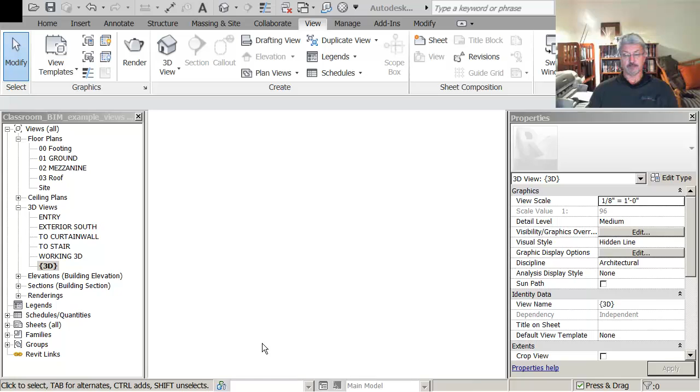So I've shown you how you can put building components in, but what I want to show you is how to just add a couple of views.

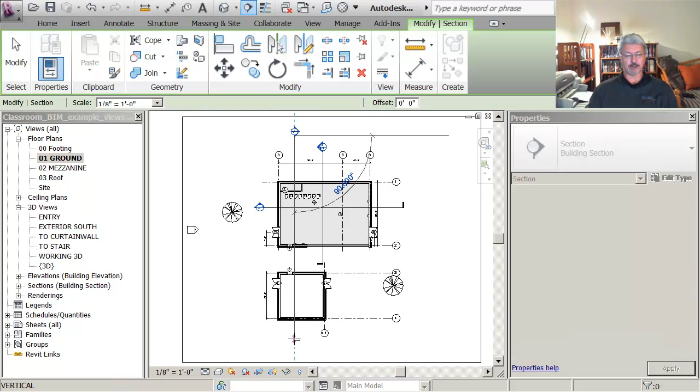So I'm going to go to the ground view, and on the view tab, I'll go first to the section view. I'm going to place a section that runs all the way down and through my model, just beginning and end. Notice that I can flip the direction to decide which way I'm looking, and I want to look from left to right. I can also decide the extent of my section, so I want to make sure this goes beyond the end wall.

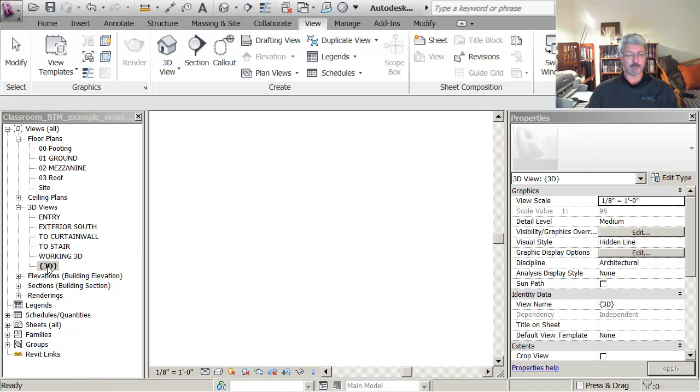Now the way I maneuver around in here is I can click on the head to take me straight to that section view. I could also find it under the sections tab, and typically I'll rename it. So I'm going to call this working section.

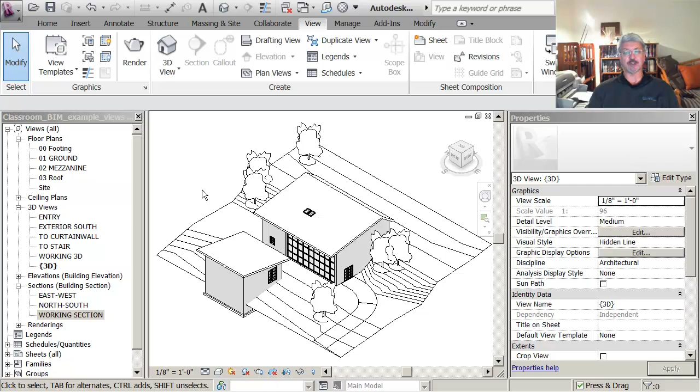I'm still thinking about designing conceptually, and it's helpful for me to have views labeled as working views, because later I can delete them and just keep the ones I need for documentation. So the other kind of view I wanted to show you is the one I've already called working 3D view, and the view itself has properties.

So if you look over here on the properties palette, I can come down and turn on the option that says section box.

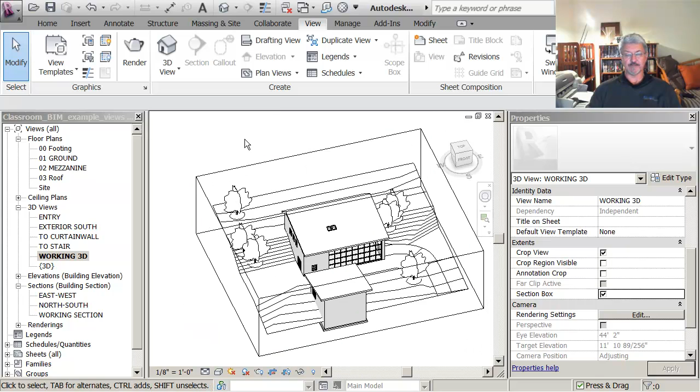In that particular view I can do things like VG, which is visibility graphics, and turn off the topography just in this view so that I don't see it. I'm also going to turn off the planting. So this is how I control what's in my views.

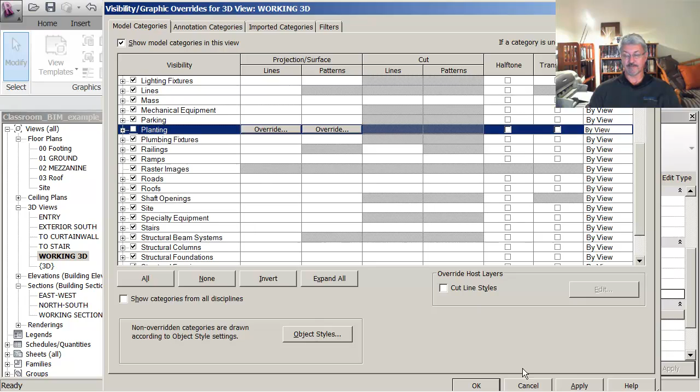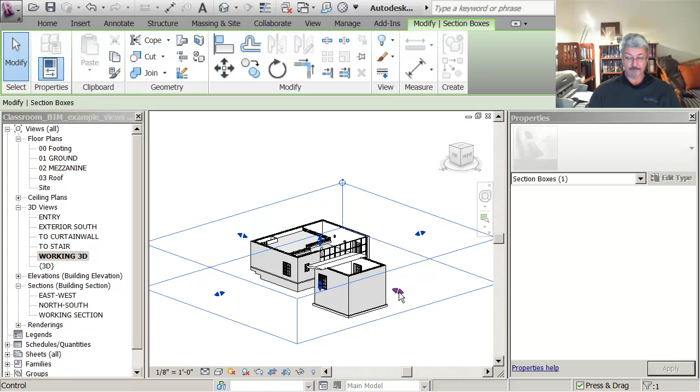And the purpose of this section box, you see, if I turn this and look at it, I haven't put foundations in here yet. What I'm going to do is select the section box, and you see that I can actually drag on a control to move it up or down through the model. So I can be moving that to adjust what I'm seeing in my model.

Let's move this just a little bit up so I'm seeing the mezzanine level. And then I can use my options here to decide whether I want to see it shaded, and I work with it like that.

The purpose of the section box is to limit how much of the model is in the view, which can improve the speed and performance as I work in a very large building.

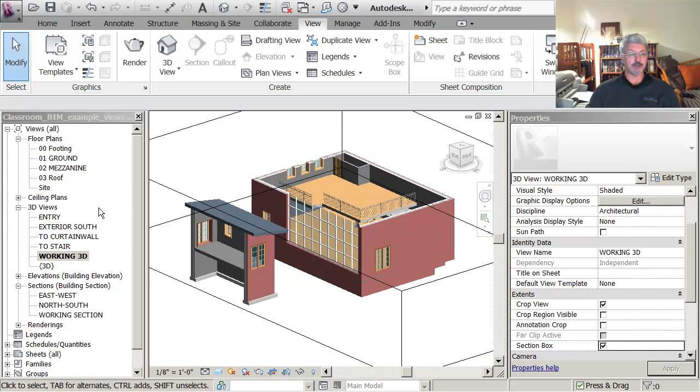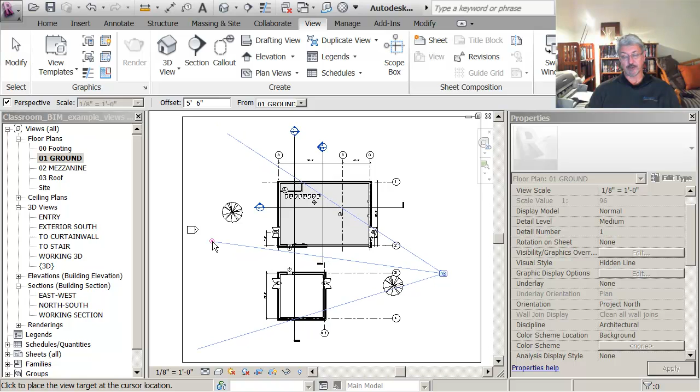The last view I want to show you is if I go back to my ground level here. What I want to do is create a view where I'm standing here and looking this way towards my building. I can go to the 3D view and a camera. I want to stand somewhere to this side of the tree, and be looking at the opening between the two buildings. So I go well beyond the opening, beyond the objects I want to see in my view, and now I can see the choice here of what it looks like.

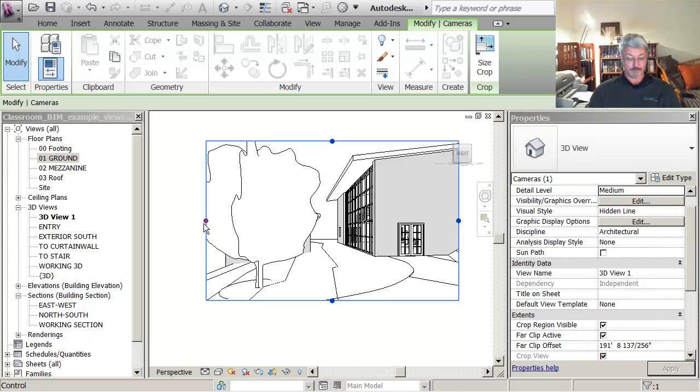So I'm seeing my space between the buildings there. I can click on this and make it a little bit bigger so I can see a bit more of my building. I'm going to adjust that slightly. I'll say ZF, zoom fit.

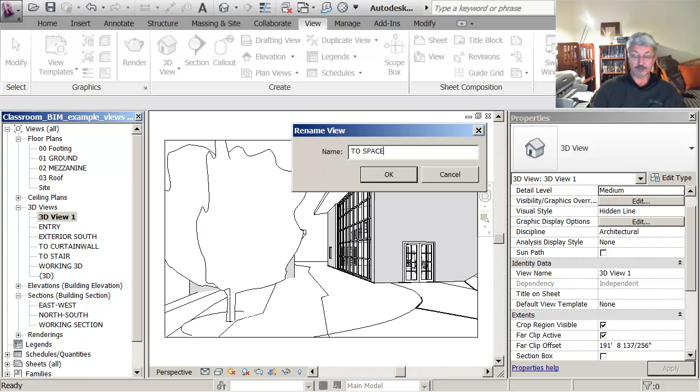And now I've got my views ready to work on. So I'm going to rename that, and I'll call it, let's do caps, only using capital letters to make it obvious which views we're working in, which ones we're creating.

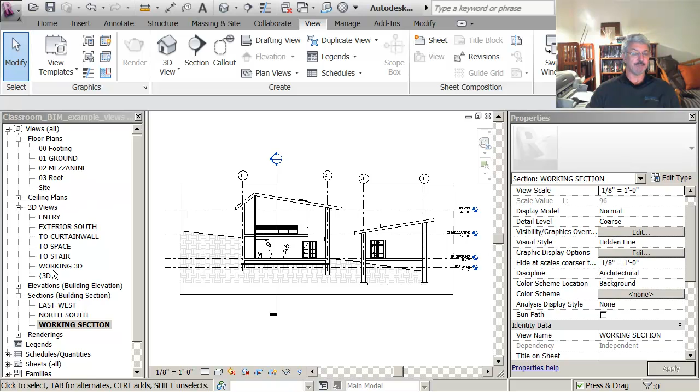So I've got that ready. I've now got a working 3D view that's helpful. I've got a working section that's really helpful because I can just move the section line and look in different ways. And I've got another 3D view that I just created called TO SPACE, where I'm looking at it like this.